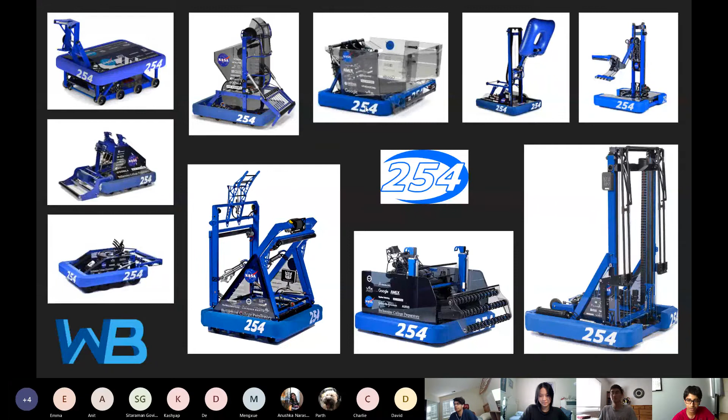So, as you might note, I've used this slide before, I think, in my strategic design presentation, right? 254 in particular tends to go with a pretty basic design layout every single year, right? They have tubing, they have gussets, and that's basically it. Tubing, gussets, plates, and that's how they run every single year. And it's gotten them 4 world championships, right?

It's less important what you use, and most important that you actually have a set, defined path for what you use. You can use sheet metal, you can use tubes, I think 330 used bent tubing. What really matters is that everyone on your team agrees on and knows what design solution you are going to execute and how you're going to do it beforehand, right? We went over that a bit in the strategic design presentation.

So we're getting a bit deeper into that in this presentation, but first, this is a rough layout of the design standardization we've done so far. We use 10-32 screws every year. Thus far, we've used socket head. Maybe in the future, we'll switch to using button heads, like 254 and 1678 do. We use 3/16 flat head rivets, and we use WCP bearings on all of our rotary contacts.

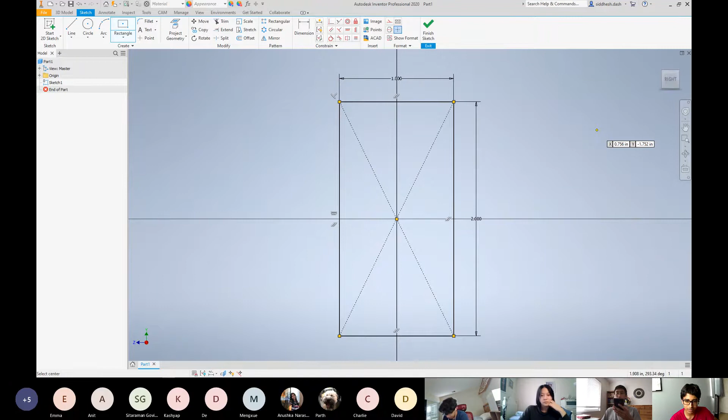Nice. Yeah. So our primary construction style is with tubing. Tubing is effectively just extrusion. You can see a few images of it back here, when we looked at 254's images, right? So the way we generally design tubing is by creating a center rectangle, spreading it out, dimensioning all of our sides. Then we offset inward by either 1/16 or 1/8. Those are the two thickness types we tend to use.

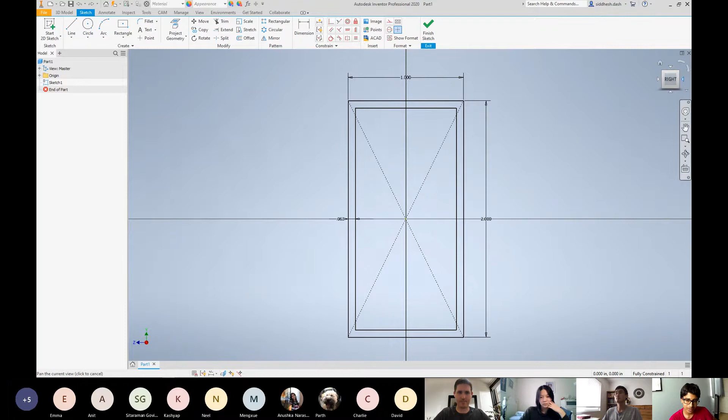We only use 1/8 if we really need to have a sturdy mechanism, or if we need to put a bearing into something. In the past, we have overused 1/8 a lot. Hopefully in the future, we shift more towards using 1/16 for basic construction needs. So here's just the process you go through, just extruding everything. I like to extrude from left to right. I recommend you pick a side to extrude from.

When you modify the length of the part later, if you constrain one side, and that's the side you extrude from, your assembly won't break. We'll get into more of why that happens later. We have an assembly presentation coming up for how to use assemblies in Autodesk Inventor. But I constrain all of the left sides of my tubing and do my extrusion away from the left side. That way, the assemblies don't break while I'm modifying tubing lengths. Just leaving that in there for future reference.

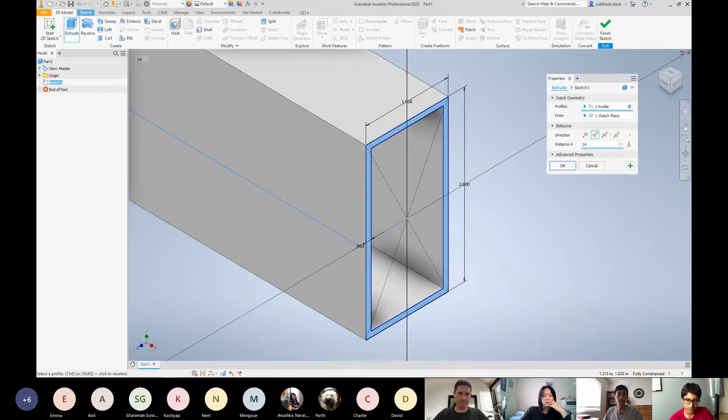So you can set your material at the top. You might be able to see, I'm pointing that out here. We use aluminum 6061-T6 for our tubing. So it's the alloy 6061 that's been heat treated, and T6 is the standardized name for it.

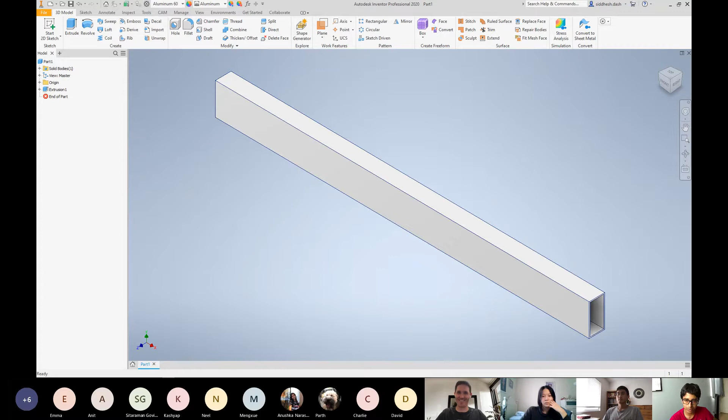Then we select a side, we sketch on that side. I use construction lines because we don't actually want to do anything with the lines. They're just for the purpose of placing this point here so that we can use a hole. I selected to surface because I didn't want it to go through the other side.

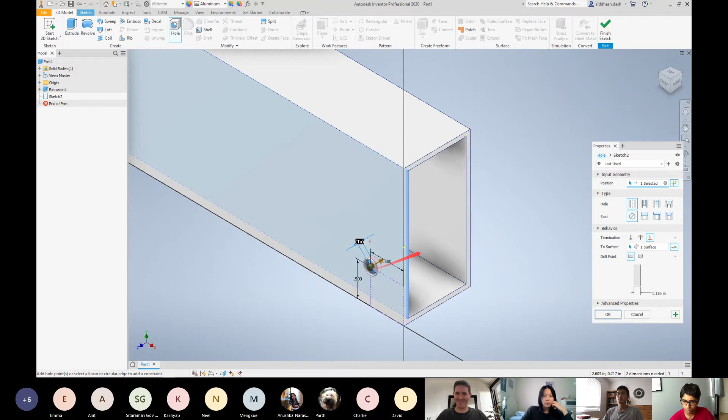If you select a through hole, that hole will go through the entire piece of tubing. I just wanted to go through one side, so I selected the other surface and used the to surface termination instead. You can also use a distance termination. I prefer to surface because it allows you to modify your thickness and still maintain your holes without edit.

So rectangular pattern. I believe we went over rectangular patterns for sketches in our last workshop. For this one, you can also do it with features. A brief note on features versus sketches, because for the most part, everything you can do with a feature, you can also do with a sketch. If you want to modify a sketch, it's a whole lot harder to do that and then maintain an assembly versus just modifying a rectangular pattern, which is a feature.

If you can use a feature instead of a sketch, it's just much easier to modify things after you're done using them. And we will end up modifying over a season, even if you don't think we will. So if you can use a feature in any system where you could use a sketch, pick the feature over picking the sketch.

So the difference in this rectangular pattern, the feature, is rather than selecting a sketch element and then patterning that, you are selecting an actual feature, in this case the hole, and then you're patterning that instead, right? So we've patterned this hole across length. So it's created a simple 1-inch interval hole pattern. This is our standardized hole pattern. We use this for almost everything.

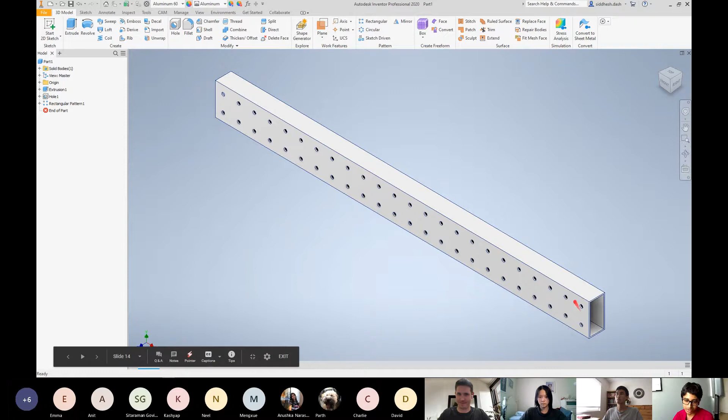So we used to just pattern the entire thing with holes, somewhat like this, right? In the future, we hope to maybe be a bit more selective about that to maintain material strength in areas where we don't need to have holes, especially with 1/16 tubing, since it's already quite thin and prone to denting. Moving on, you might note that 1678 uses a 1/2-inch pattern instead of a 1-inch interval pattern.

In a perfect world, there's no gap between your half-inch hex axle and a gear. In reality, that's not so true. Backlash is exacerbated by things like gears being able to move around on an axle from side to side. So taking whatever actions you can to reduce backlash by doing just better machining standards and whatnot is generally just a good thing to do as design goes.

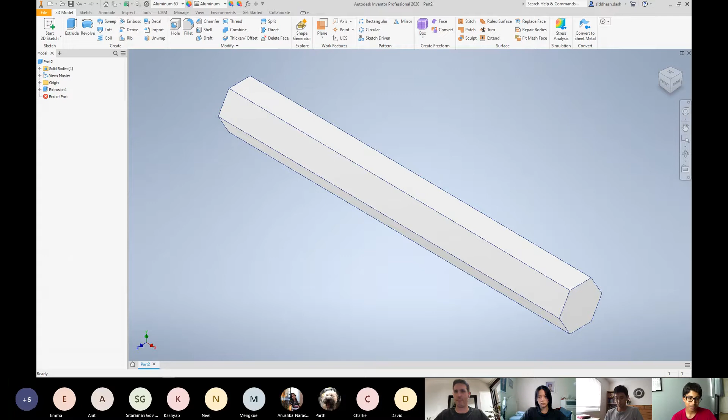Unfortunately, both spacers and collars aren't perfect solutions. They still allow a decent amount of wiggle room from side to side. Spacers are decisively better. Collars kind of suck at it. But the long and short of it is there's a better solution. In this case, I just slapped this in here to teach revolution.

So I started with a center rectangle. We put a line through the center too. Keep in mind you can't use a construction line for this because we're going to be doing some 3D modeling with it. And then we used a revolve utility. So you just select your profile similar to how you do in an extrude. You select an axis on which to rotate it. You can select this, which we almost always want to do.

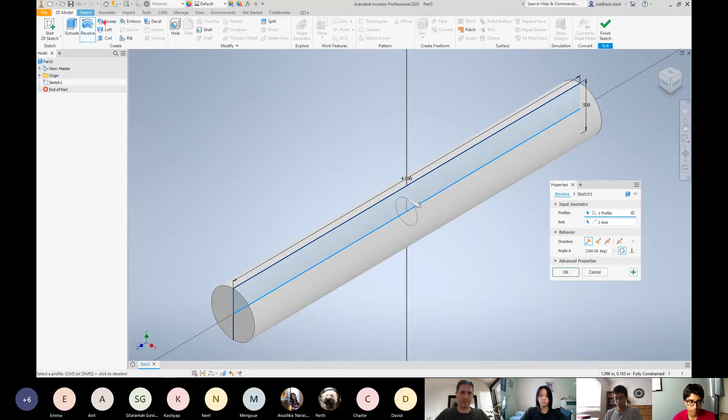We don't find ourselves in revolutions very often. Most of the time it's extrusions, but it is one of the 2 main 3D modeling utilities. So I figured it would be nice to teach it. Again, that's not exactly useful for an axle either, for numerous reasons, but that's not why I stuck it in here. So back to the point at hand.

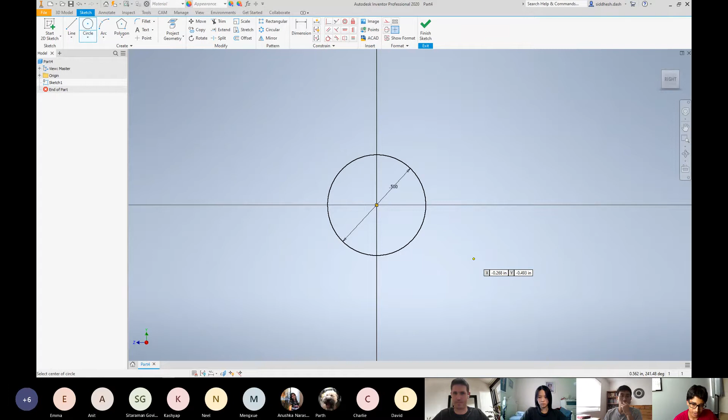If we really want to make an axle with minimal backlash, and this isn't something we've done in the past, partially because the CNC mill is somewhat new, but this is something Team 971 has done a lot. They're another top team. You don't need to know about them, but the idea is this increases efficiency in the long run. So we make all of our axles out of aluminum 7075. I know the texture is kind of terrible, but that's what our hex axles are made of.

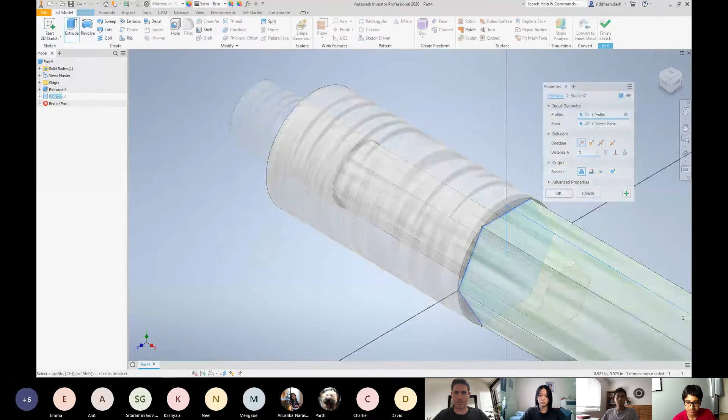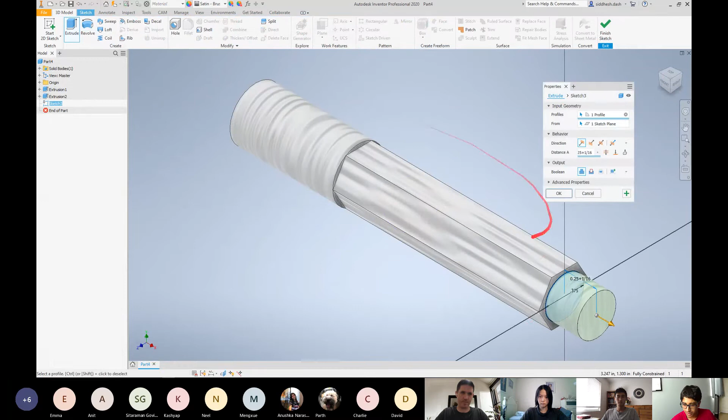So in theory, you start with that, then you extrude from that. And what happens is basically this ½ inch that's now getting milled out into a hex, that edge over there serves as a spacer in and of itself, right? Ideally, you also have another spacer strapped around it, but tiny things like this in axle design help reduce backlash a good bit. Then you can use this. Now you're using the hex axle as a spacer.

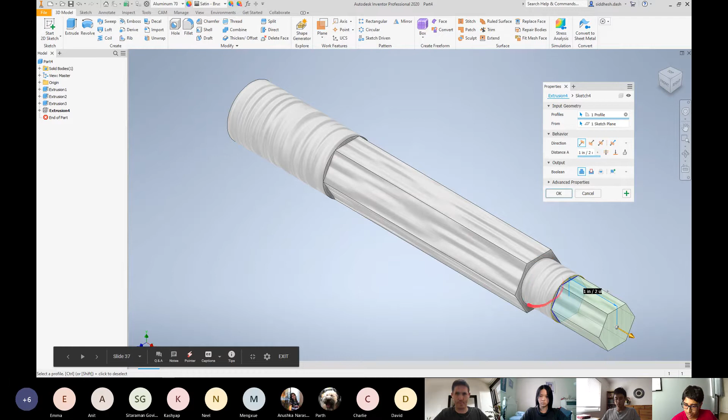You do another one. You extend a hex from that hex. This section, by the way, would go through a bearing. So you have a hex axle extending from that, presumably attaching to some sort of wheel. You have a tiny addition over here, so you can put that round through a bearing. Then you have another hex, a 3/8 hex that extends from there. You put a pulley through there. You extend it a tiny bit, just make a groove for a retaining ring, cap the groove off, and you're well and good.

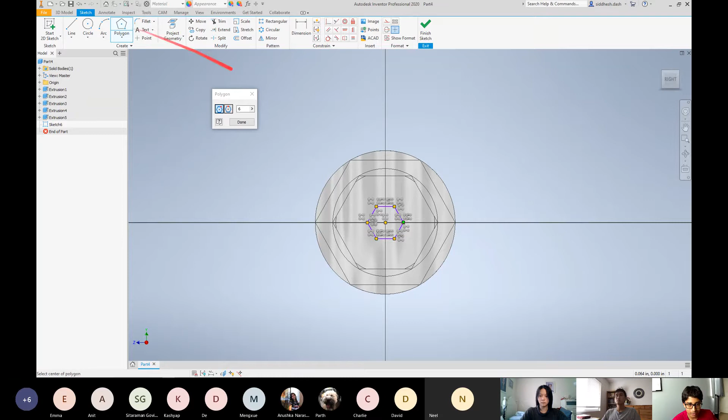I'm going to highlight on this for a second. I think we've shown this a couple times now. You can use the polygon tab over here to create polygons of your choice. It defaults at 6, as it should. We use hexagons a lot more than any other random shape. So it's here, I suppose. We don't use it that often. When we do use it, it'll be for hole patterning and for axle cutting. So the more you know.

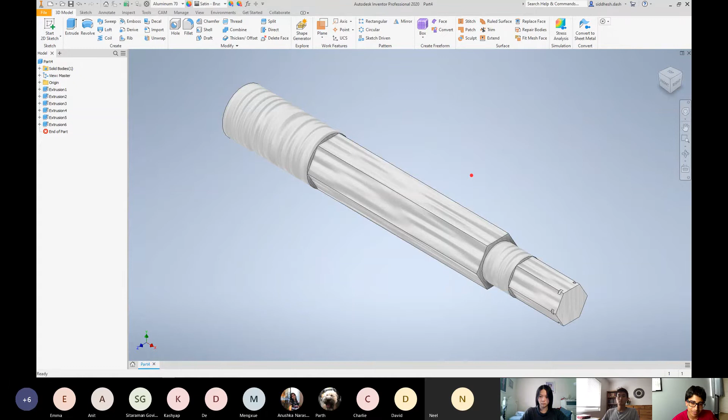You cap off the end of that groove there. In theory, this axle design helps reduce backlash by a good bit. Making it is long and tedious without a CNC lathe, but it is possible. I know 971 had a manufacturing student a while ago who just did it all manually. That was pretty neat to hear about.

Here's another feature. So similarly to how in the last workshop we used mirrors on a sketch, you can also use mirrors on features, right? So we selected the entire solid. We selected our YZ mirror plane, and we mirrored the entire solid around that plane. So now we have an entire axle. This is an axle for a flywheel, in theory, that uses a minimal amount of acetal spacers to actually support the flywheel.

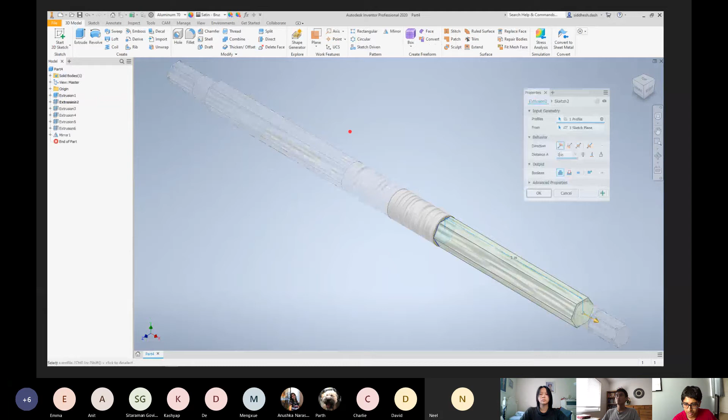So here's a bit of modification I decided to include because I accidentally made it the wrong length. So the advantage of a mirror is if I had been doing this with 2 different extrusions, right, I would have to modify this length twice. Now, because I mirrored it, I can just change distance A to 3 inches instead of the previous 2 inches, and bingo, it's already longer. I didn't have to change that length at all.

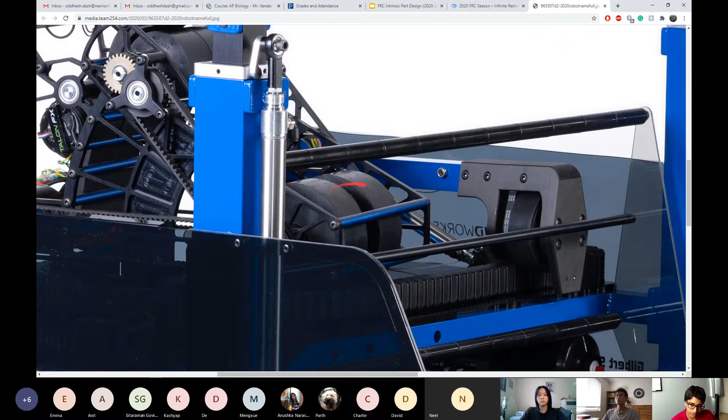So this was supposed to be a model of 254's flywheel for 2020. In theory, how they would have designed it to minimize backlash. We haven't done complicated axle design in the past. Hopefully in the future we can get into that a bit.

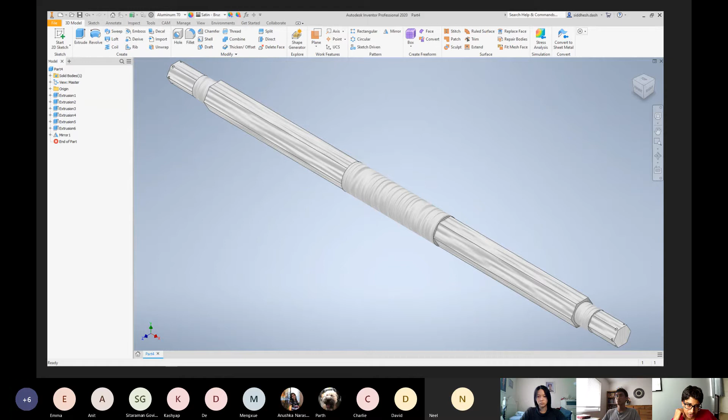I think 971 did a calculation on how much good axle design contributes to limiting backlash. I'll link that video in the channel later, but I think it came out to something like 2% for their 2018 gearbox. It was a quite large gearbox, so tiny things like that were easier to notice. 2-3%. It's pretty large. It's the largest factor out of many of the backlash considerations they tested, including using belt versus using chain, which is pretty big. You'd expect that to have a larger effect, honestly.

So, and now for this other stuff. So I'm going to be explaining how to CAD this going forward. We've already covered the 3D modeling principles we need for that. So first things first, sheet parts. I used gussets for an example. We use gussets to hold together tubing, kind of like a splint.

You know, if you break your leg, which I hope no one here breaks their leg anytime soon, but you know, if you break your leg, you use a splint to make it easier to heal, right? Similarly to that, gussets hold tubing together, except tubing isn't supposed to move. Gussets keep them from moving, kind of like a splint does.

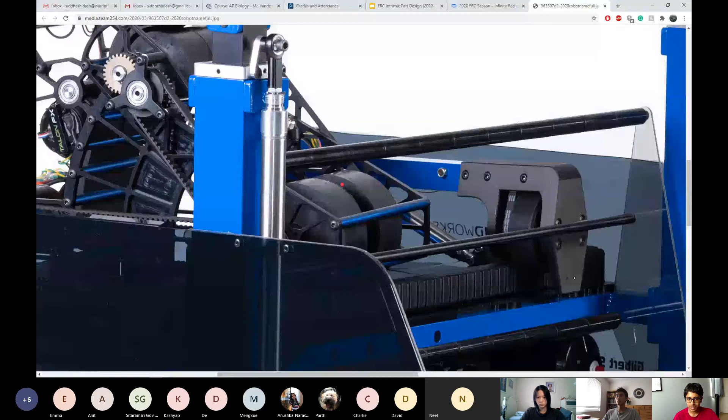In the future, we might manufacture our own gussets. A lot of teams use 1/16 7075 T6, similarly to the material we use for this axle. Also 7075 T6. 7075 aluminum is comparable in strength to low strength steels. So you can get thinner stock and still achieve a strong result.

Most teams use a standard 5 or 3 inches along each tube length for their gussets. The big advantage of external gussets is they're easily repairable, they're easily replaceable, and they're easy to mass produce if you have a CNC mill or a CNC router, right? Their complexity is fairly simple, 2.5D. Basically, if you can simplify a part into a 2D outline for use on, say, a router, then that complexity is referred to as 2.5D or 2.5 dimensions.

Just as a note, since I use gussets as an example of sheet parts, we also make our belly pan out of sheet. I mean, hopefully we will. In the past, we made it out of fiberglass. You can also make gussets out of 3D printed carbon fiber inlay, nylon with carbon fiber chopped into it.

So internal gussets have been tried by a number of teams. They haven't failed so far as I know. I know 3339 tried that, and 1323 also tried it out. Markforged Onyx, which is the material we use on our final robot, can be comparable to aluminum 6061 if done correctly, as far as stress analysis shows. So strength isn't really an issue with that.

So moving on, plate parts. Now the major difference between plate parts and sheet parts is what we tend to utilize them for. In industry, I know plate parts are generally a quarter inch or thicker. Parts that are utilized more as a skin and tend to be 2.5D in complexity tend to be sheet parts, whereas plate parts tend to be 2.5D plus. 2.5D plus means that you have, say, counterbores or depth pocketing, which means you can't simplify the part down to a 2D image.

It's a tad bit more complex than that, but it does mean that the part has suitable depth to be used for purposes like holding bearings. Now, in the future, hopefully we'll be using 1/4 inch aluminum 6061 for our parts. This is what we've done in the past.

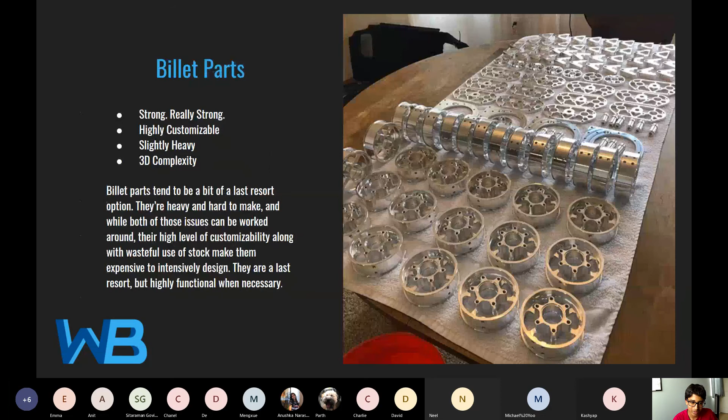So yeah, that's about it. This is a rough guide to standardization of parts on a robot. Billet parts can be made reasonably with extrusion. You can use revolution if necessary. More of the complex things can be used, but again, we stick to extrusion for a number of reasons.

Plate parts can be done almost entirely with extrusion. You don't really need many cut extrusions typically either. When you're making a hole, I think I can take you back to the hole we made at the beginning, just to explain how to make holes as features.

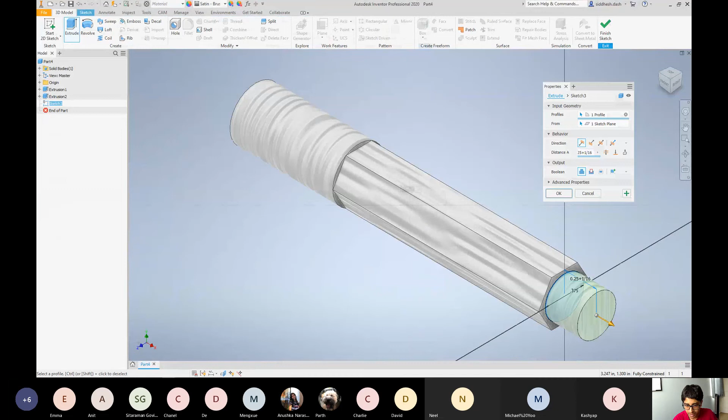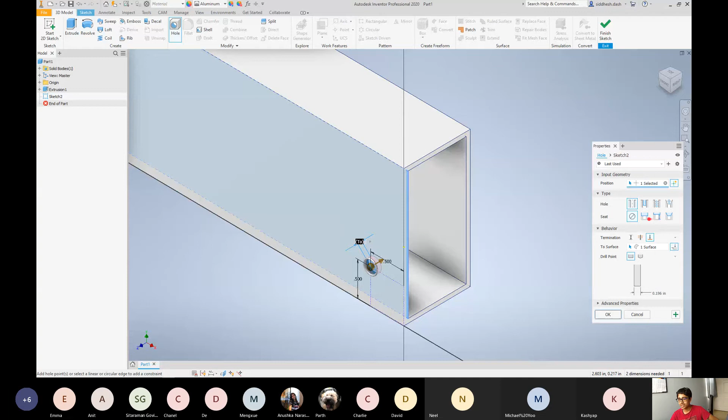Okay, but you can select the option to thread and counterbore. Now, there are a number of seats you can make for a counterbore. If you wanted to make that particular one I used in the example image, you could just use a seat counterbore. So little things like that can generally be done for 2.5D plus parts in your hole operations rather than requiring different extrusion operations.

Occasionally, yeah, you will have to use a cut operation. We try to avoid using extrusion and revolutions in favor of just basic holes instead, just because it's compacting more stuff into less space, which reduces your CAD complexity. That's generally something that we try to prioritize, not as highly as version control and the ability to go back and change things easily, but highly enough that it would affect our decision to use, say, a hole pattern rather than a cut extrusion.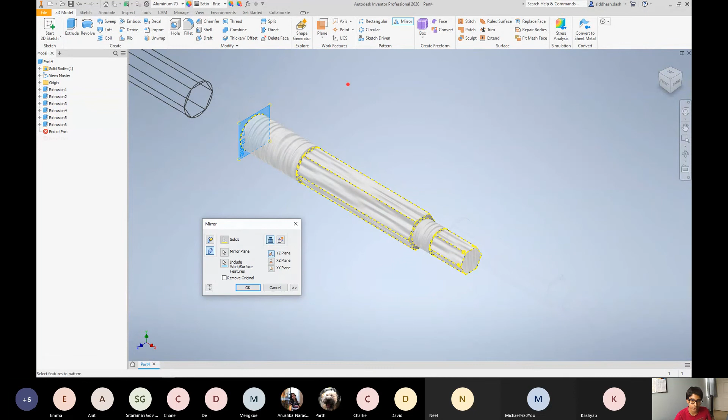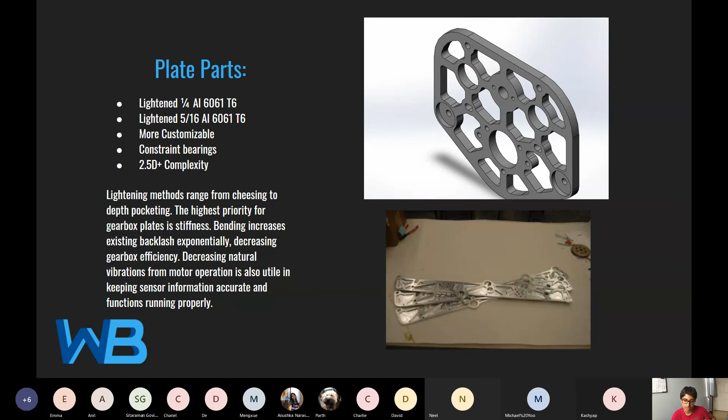For 3D printed parts, if you don't need internal strength and your shell is good enough, there's a shell function you can use. It's pretty simple: you just click shell, then select your offset. It doesn't need much explanation, it's basically exactly like it sounds. We tend to avoid that because with the Markforged you can automatically reduce internal density and everything, so Parth can explain more about that later if he wants.

Does anyone else want to add their own points? I think we can go directly to stuff now.

Does anyone have stuff? I'm gonna grab some apples right now. Ooh, pears, even better. Personal opinion: pears are better than apples, they just taste better and everything. Alright, Dave, end the recording with your love for pears on public record.

Is my audio good? It's vibrating a little, but not enough that we can't hear you. It happened for me too. Oh, it's happening for me too. Sid, do you have microphones in, like headphones? I do not have headphones. Also my speaker is disconnected from my microphone, and as far as I know it's not actively canceling any audio input. So it's probably me, honestly. In that case I'll just mute Sid. He muted himself.